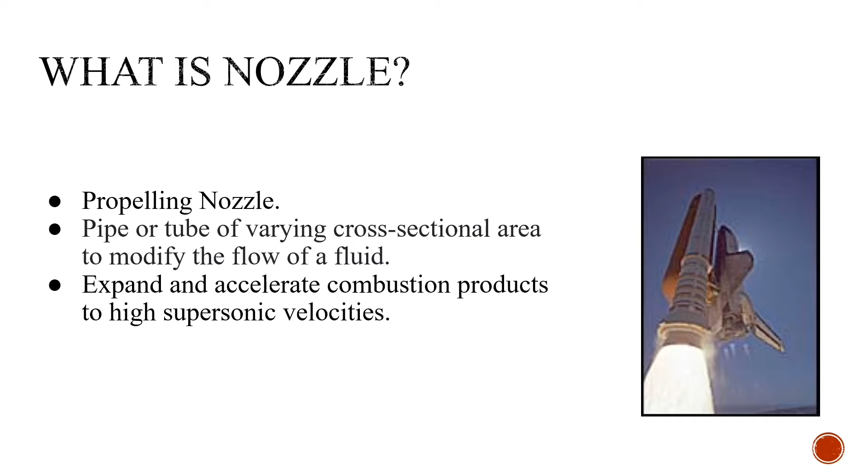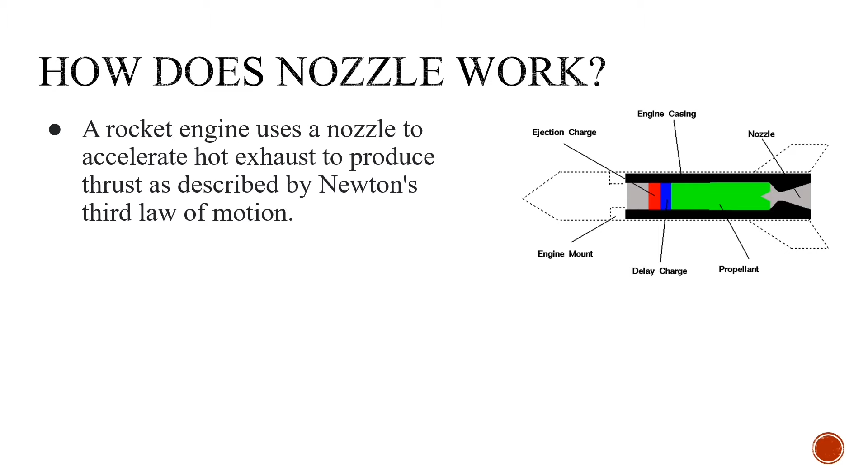How does the nozzle work? During the combustion of fuel, chemical energy is converted into thermal energy and pressure energy. The combustion gases at this stage are at a high pressure and temperature, and this gas under such high pressure expands through the nozzle, during which the pressure energy is converted into kinetic energy, which in turn moves the vessel in the direction opposite to that of the exhaust gas, according to Newton's third law.

And what is the function of the nozzle? First is to remove combustion gas and heat produced by the engine when burning fuel. Second is to provide sufficient thrust energy for the rocket to reach outer space.

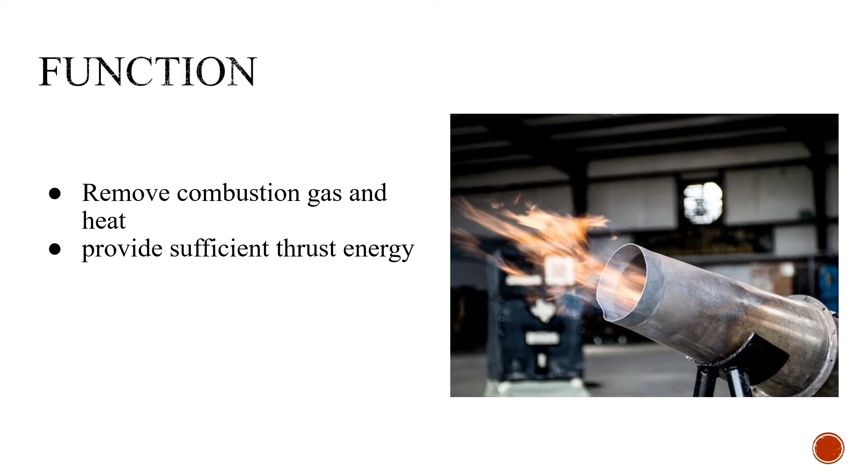My name is Guo Pei Liang. The constraint in our nozzle is mainly the cost and thermal conductivity. Our objective is to use reusable materials which are eco-friendly and have long durability. Our nozzle should be rust resistant and also thick.

After launching to space, the outer parts of the nozzle will be removed from the rocket and will be dropped into the ocean, which will float and let ships search for them. That is why our materials should be rust resistant, as they will have to stay in the ocean for a while. Why thick? The rocket's gaseous products' temperature is a lot higher than the nozzle's temperature itself.

There will be some parts of the nozzle wall that are melted and burned away. The current standard rocket nozzle can be reused up to 8 times. That is why our nozzle should be thick for later use.

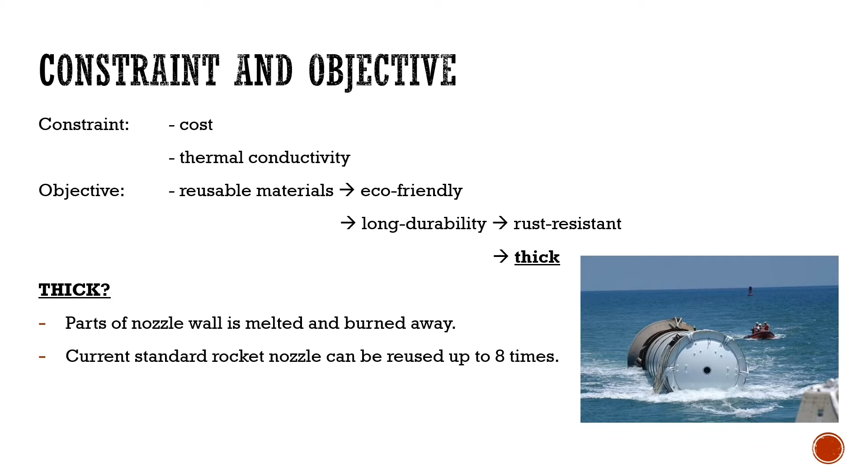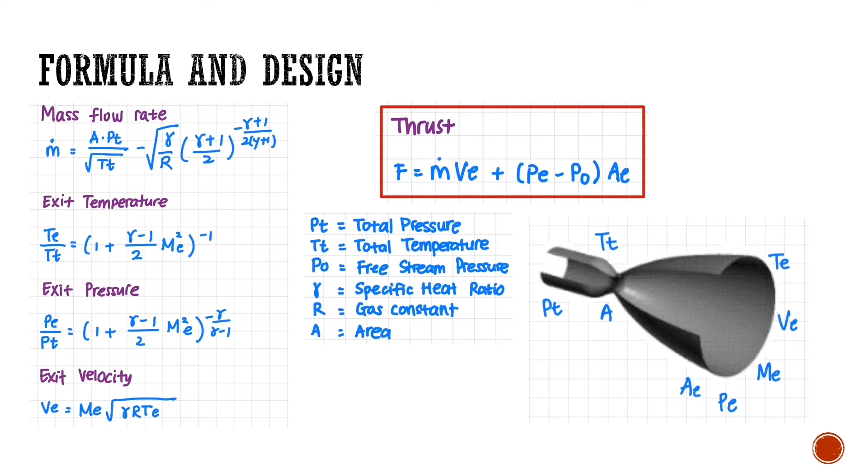Our next speaker is Dang Han Bin. In this section, I will try to calculate the rocket thrust. As you can see, I wrote there the rocket thrust equation: F equals mass flow rate times exit velocity plus exit pressure minus atmospheric pressure, times exit area.

So, the bigger F is, the stronger the force coming out from the rocket nozzle, resulting in the rocket accelerating faster. And to maximize F, the thrust, we can maximize the exit pressure and the exit area. Why don't I consider maximizing the mass flow rate and exit velocity? Because mass flow rate and exit velocity depend on what fuel the rocket uses, and we want to design the nozzle, so I don't consider it. And atmospheric pressure is constant, so we cannot change it.

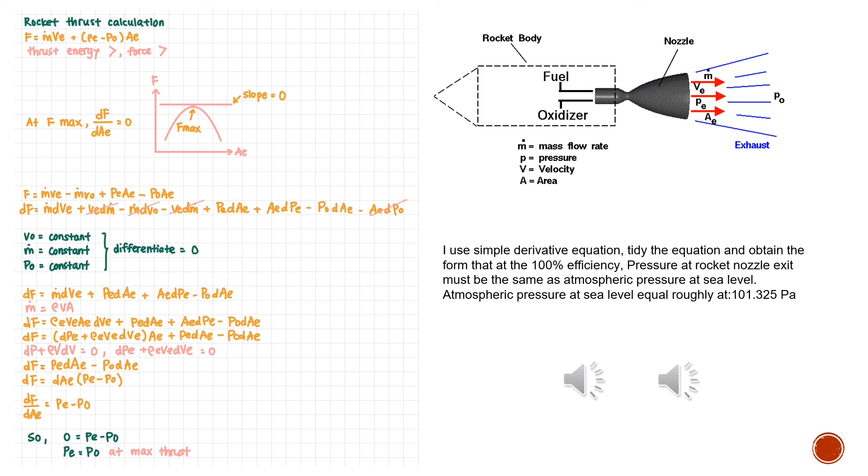And then we know in the beginning that derivative of thrust equation divided by derivative of exit area equals to 0. So at maximum thrust, pressure at the nozzle exit must be equal to atmospheric pressure at sea level because rocket launches at sea level. And then we know that atmospheric pressure at sea level is 101.325 Pa, which is really high, and I think it's almost impossible to achieve exit pressure equal to atmospheric pressure. So I think the conclusion of this calculation is we must design the exit area as efficient as possible so it will generate the maximum exit pressure.

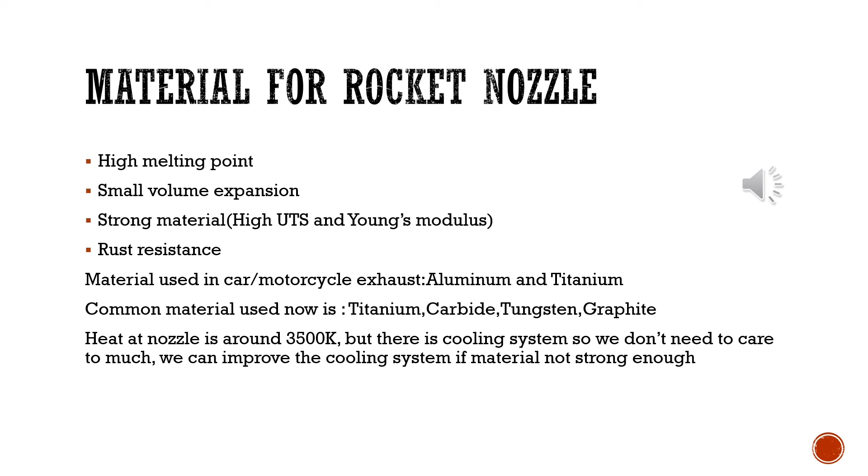So here are some criteria for suitable material for rocket nozzle. And I also found out why we cannot use aluminum on rocket nozzle, because aluminum is commonly used in car or motorcycle exhaust. I think it's because aluminum cannot withstand the really extreme heat and pressure on the rocket nozzle. And the common material used now is a mix of titanium carbide, tungsten, and graphite. And heat at rocket nozzle is around 3500 Kelvin, which is very high, and I don't think titanium can withstand it, but I think it's not a big matter because there is a cooling system on the rocket. So if material is not good enough, we can improve the cooling system.

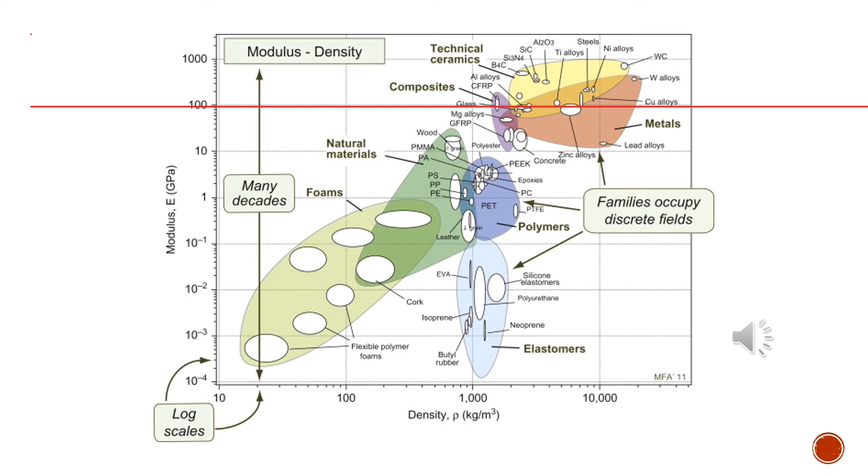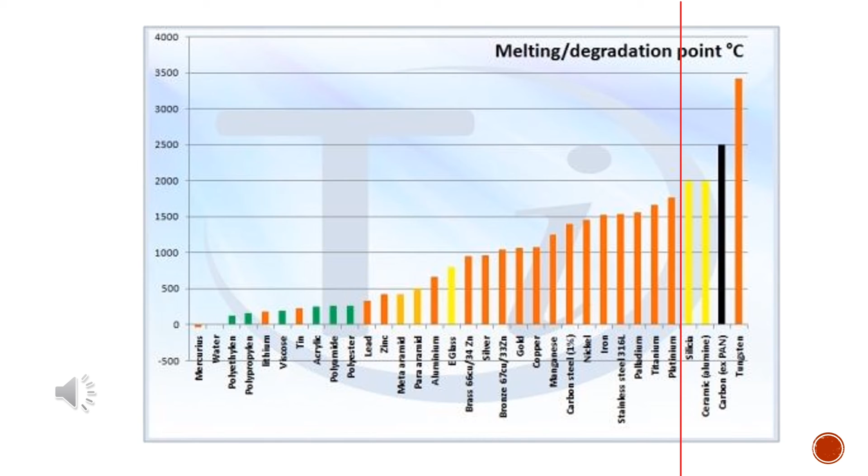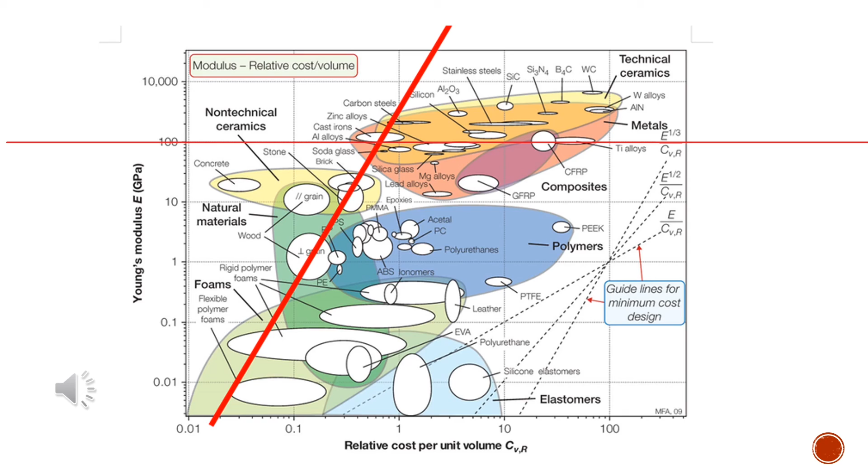For the material selection, as we can see, we need a strong material. So on this bubble chart, we look for material with modulus higher than 100, and then we found some metals there. And then we also need a material with high melting point. So based on this chart, I will consider silica, ceramic, carbon, and tungsten as suitable materials also. This chart is of Young's modulus and cost. So as we can see, we need a cheap material with high Young's modulus. And then the material is also the same, it's metals. And then I found out there are some suitable materials. The materials are titanium, tungsten, silicon carbide, and graphite.

So the rocket body will mainly use titanium as part of the mixed metals. Why we need to mix the titanium with other materials despite the strength of titanium and the cost, which is not too expensive, I think? Yeah, so we need to mix it with carbide graphite to improve the melting point, so the material won't easily melt and easily erode. And then we also need tungsten because of the really high melting point and the metal properties of the material, but tungsten is quite expensive, so maybe put a little bit of tungsten in the material.

So in conclusion, the material mainly will be a mixed material, but I think we can consider putting aluminum. I said before that aluminum is not suitable because of the low melting point and the low strength, but aluminum costs really cheap, so I think maybe we can consider using it. But I think for rocket maybe don't, because of the factor of safety.